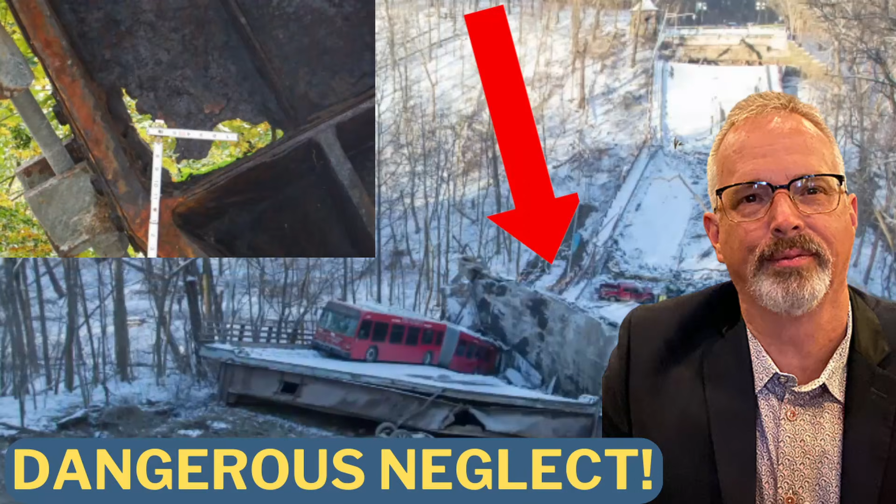We saw this with the Fern Hollow Bridge that had extensive corrosion of the support legs. There were 4 support legs for that bridge. And the corrosion was clear through the main structural support, which again was non-redundant. And then over time, the deterioration resulted in the bridge not being able to carry its design load, and it collapsed as traffic, including a segmented double bus, triggered the collapse, it appears from that video.

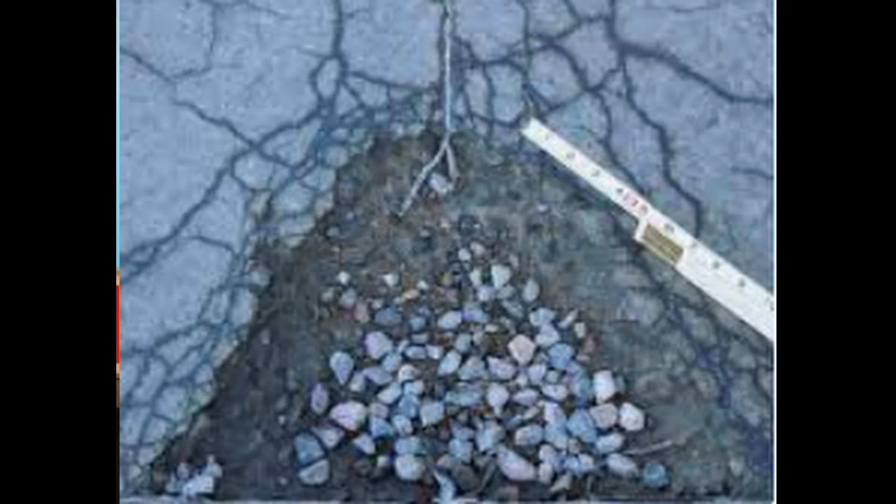So concrete that doesn't contain air entrainment is much more susceptible to damage from freeze-thaw action. It basically causes spalling and deterioration of the concrete over time. You may have seen this on driveways or patios in cold climates where it just kind of chips away by itself. That's freeze-thaw action. And then deck joints leaking above PT anchorage assembly throughout the bridge.

So again, these assemblies aren't visible in many parts of the bridge, but yet they're exposed to water and they know they're deteriorating. In fact, it's not just plain water, it's salt water. When the snow and ice melts in the winter and they salt these bridge decks to keep ice from forming. And this salty water is extremely corrosive to steel elements in bridges like this.

So here they talk about the capacity for the bridge to carry the design loading is just not there because of this deterioration. It says here, repairs and strengthening of the bridge would be a complex operation that carries the risk with regards to viability and sufficiency to fully address the deficiencies within the system. The ability to thoroughly identify and access all areas of the PT systems that require repair carries risk. This is due to the inaccessibility of locations on the structure and the geometry of the PT beams themselves.

The viability of repair requires the removal and replacement of the existing deck to lower locked-in load within the PT beams. Removing the existing deck carries risk due to the significant load redistribution that has occurred with the loss of the tie-downs at Piers 6 and 7. The ability to reuse the existing beams for anchoring of external strengthening is a risk due to the unsound concrete present at the beam ends. The repair and strengthening options for the Washington Bridge are limited, complex, and do not completely mitigate the identified risks with the structure. Now let's go on here.

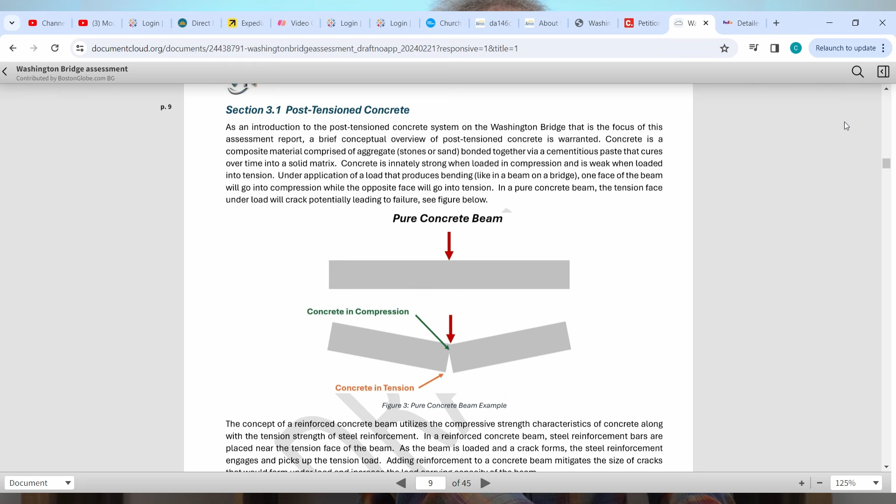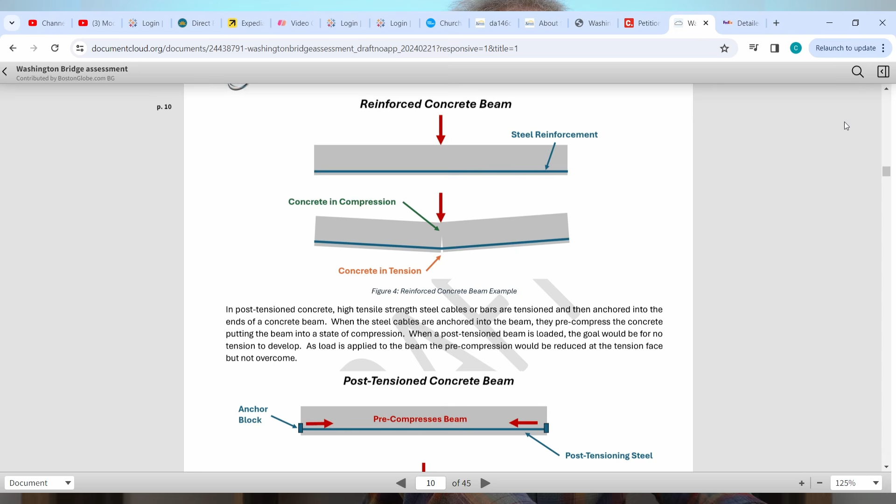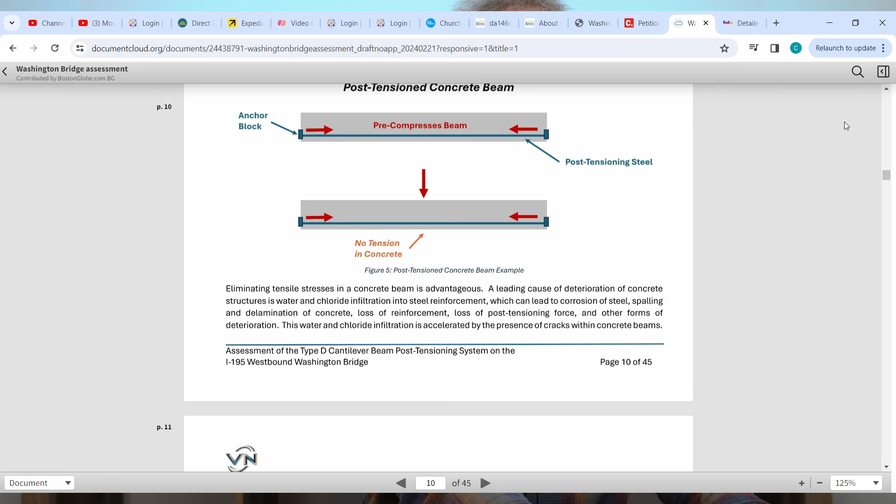They do a demonstration of how post-tensioning works for a concrete beam. First they show a simple beam that's not reinforced, which is prone to tension cracking on the opposite side of the member that's being loaded. And then you have normal reinforcement where cracks can still occur. And then you have a post-tension beam that carries the load without the development of such cracks. So in other words, you rupture those reinforcing elements and the concrete's likely to crack, which is what's happened at numerous locations in this bridge.

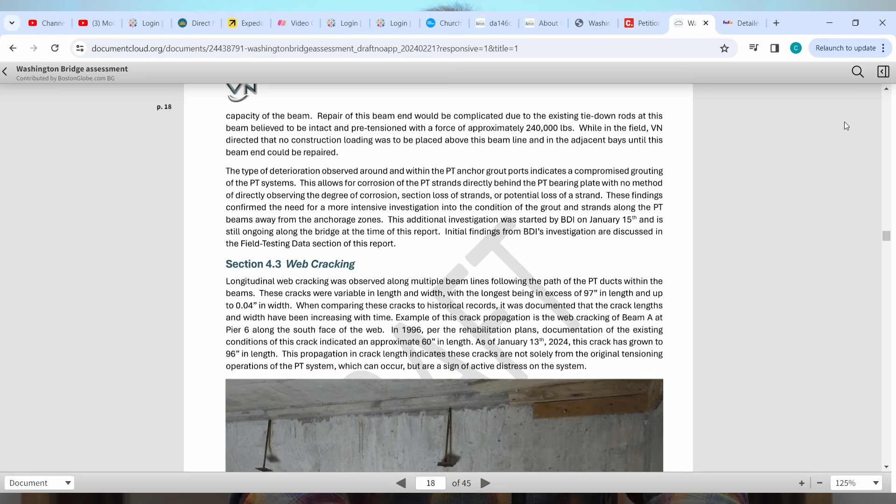I mean, we just see example after example of poor condition. This bridge was documented to be in poor condition for several years, including its most recent inspection in July of 2023. You see longitudinal cracking in the web of the beam for Pier 6. Look at all these cracks here. It says, inspection photo of distress found at end of beam A near Pier 6. That kind of cracking is very problematic.

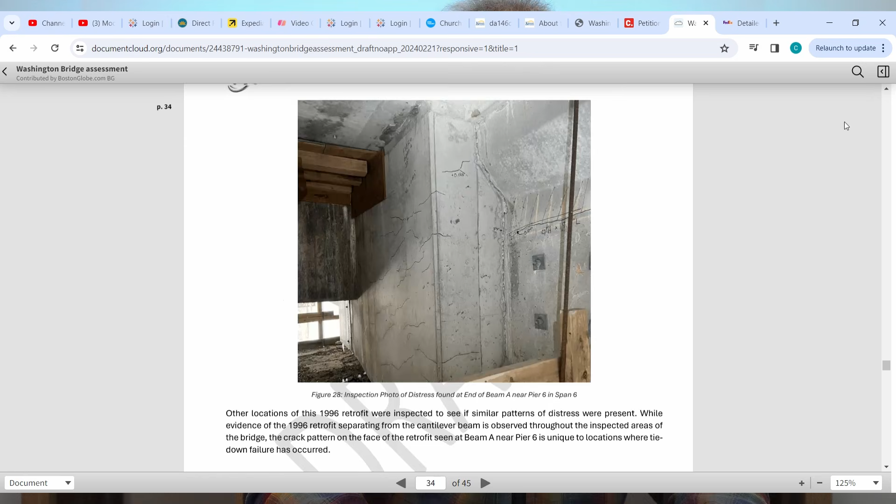So let's go to the conclusions in the report, such as they are. So here they go through the review of repair and strengthening options. I don't want to go through this in a lot of detail. Let's go through the bottom line. To thoroughly repair and strengthen the Washington Bridge would require a combination of the above or similar repair and strengthening concepts. None of the repair and strengthening schemes noted, however, addresses water infiltration at deck joint locations. Water infiltration at these locations directly over the PT anchorage assemblies would remain a long-term risk for the structure.

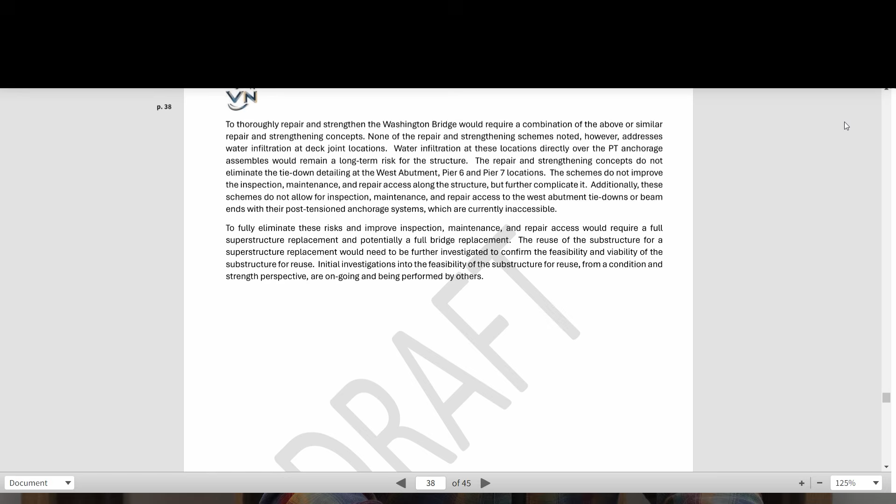The repair and strengthening concepts do not eliminate the tie-down detailing at the west abutment, Pier 6 and Pier 7 locations. The schemes do not improve the inspection, maintenance, and repair access along the structure, but further complicate it. Additionally, these schemes do not allow for the inspection, maintenance, and repair access to the west abutment tie-downs or beam ends with their post-tensioned anchorage systems, which are currently inaccessible. To fully eliminate these risks and improve inspection, maintenance, and repair access would require a full superstructure replacement and potentially a full bridge replacement.

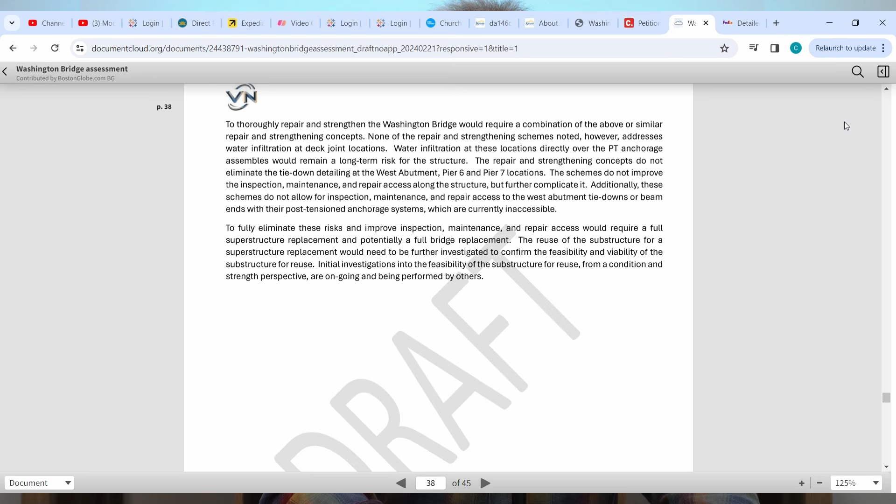The reuse of the substructure for a superstructure replacement would need to be further investigated to confirm the feasibility and viability of the substructure for reuse. Initial investigations into the feasibility of the substructure for reuse from a condition and strength perspective are ongoing and being performed by others. So one of the things they mentioned in the report is if they try and repair this bridge, and I perhaps should go through this real quick in terms of what the options were for repair.

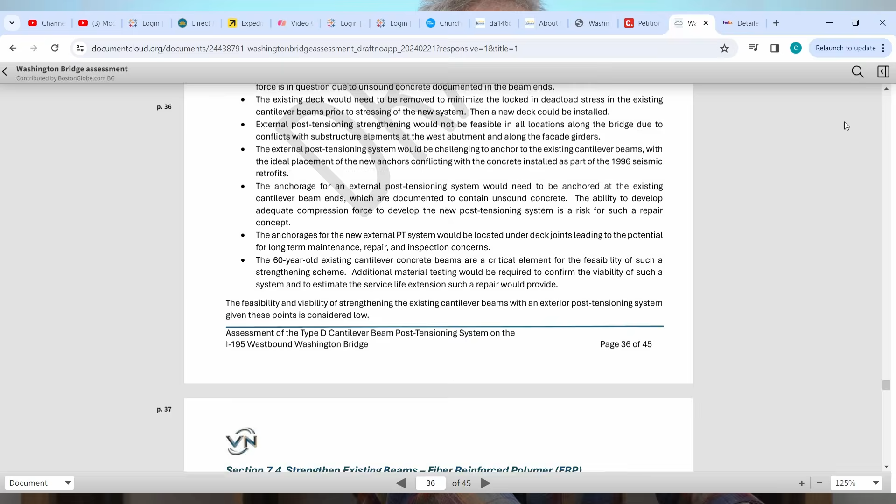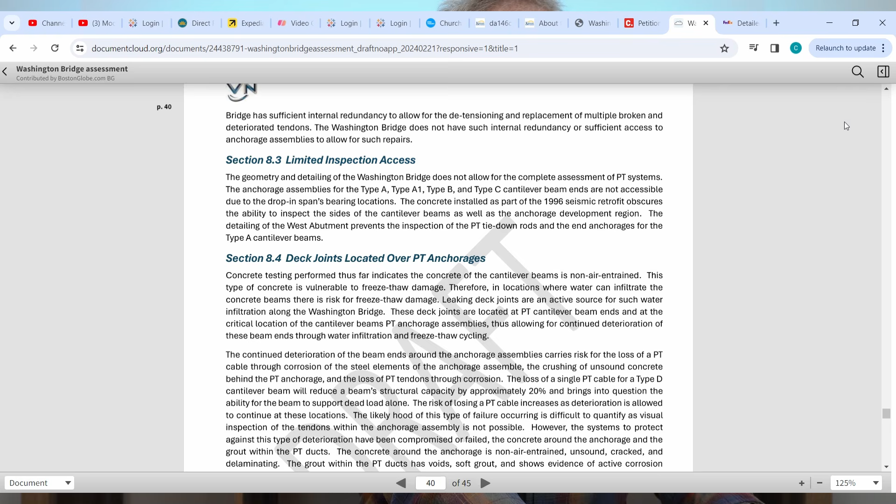So you close the joints along the length of the bridge to prevent water infiltration. You repair the post-tensioning system and beams. You strengthen the existing beams using external post-tensioning systems. And then you strengthen existing beams using fiber-reinforced polymer. You can put another beam next to the one that has distress, and there's other methods you could look at. So let's look at a couple things here.

In a nutshell, what this report indicates is that trying to repair this bridge would not only be dangerous, it'd be kind of a nightmare because it's like working on an old house. I don't know if you've had this experience, but I had a house that was over 50 years old, and I'd go to, say, fix a plumbing related problem, and there would be 2 or 3 other things that I would discover in the course of that repair that also had to be fixed. And that's what's going to happen here if they decide to go with a repair option. I don't see it happening.

The bridge is at the end of its normal design life at 55 years at this point. The engineer in this report points out that this was a very complicated design. It wasn't a very good design from the standpoint of maintenance and inspection. And if you're responsible for managing the transportation infrastructure for projects in Rhode Island, you need some degree of certainty. You can't tell people, okay, it's going to take us 12 months to repair the bridge, and then you get into it and realize, oh, no, it's not repairable, or we found many other things that now have to be fixed. So instead of 12 months, it's going to be 24 or 36 months. So they'd be better off just simply replacing the bridge.

Now, that's going to be a major undertaking. And as I pointed out in previous videos, there's permitting aspects. I don't think a design has been performed for a westbound bridge replacement. So the most expedient thing, even though it could take a long time, I think in my previous video, I thought that they could accelerate bridge replacement and it would take somewhere between 18 to 24 months. And many of you commented, there's no way, this is going to take much longer. And seeing how slowly they've moved on this so far, I completely agree.

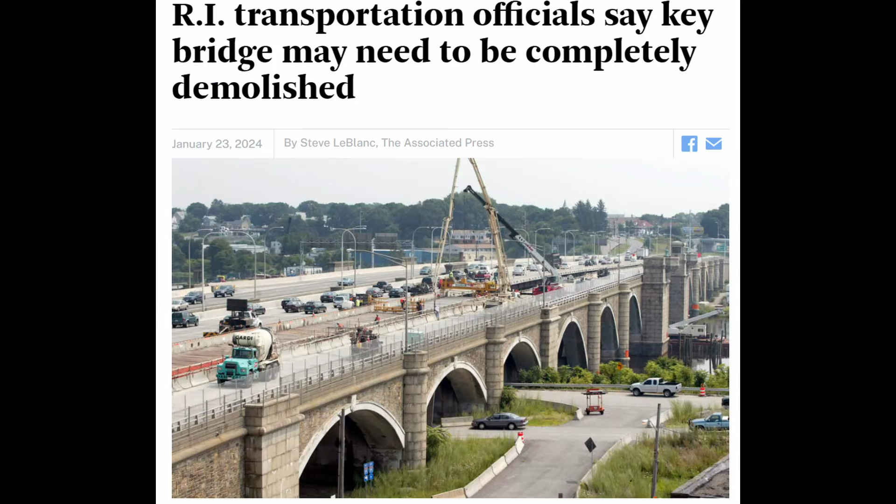I think the bridge is going to have to be replaced. There's no question about it. I don't know why they're dragging their feet, trying to get more data or trying to get the nerve to just tell people that their impacts are going to be ongoing for a much longer period of time. So Alviti admitted a few weeks ago that the bridge may need to be replaced altogether, and that was before this draft engineering report was leaked to the media. As I mentioned, this bridge was noted to be in poor condition, that is structurally deficient, for several years, including its most recent inspection in July of 2023.

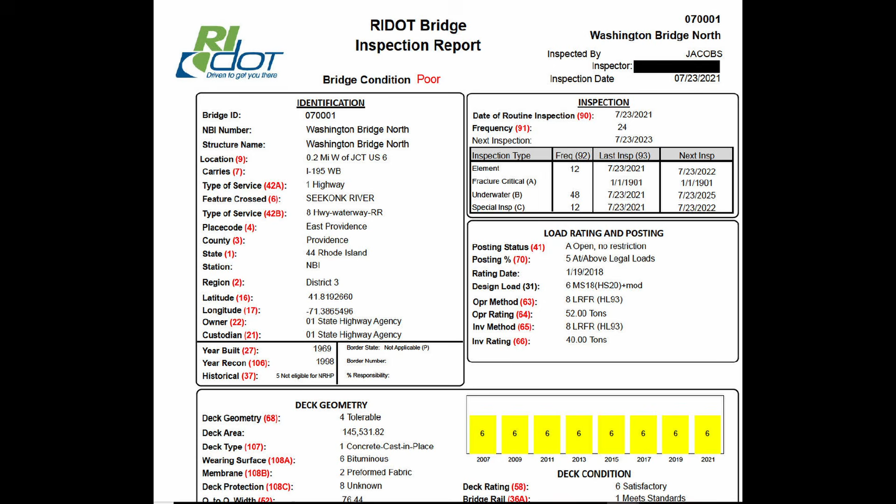Now, I noticed in this engineering report, they didn't get into the timeline of the failure of the components that they noted in their report. And they didn't get into whether there were any deficiencies in previous inspections that might have missed some of these serious problems with the bridge. But if you read between the lines in their report, they basically say this bridge is extremely hard to inspect and know exactly what's going on with it, given the way it was designed and built.

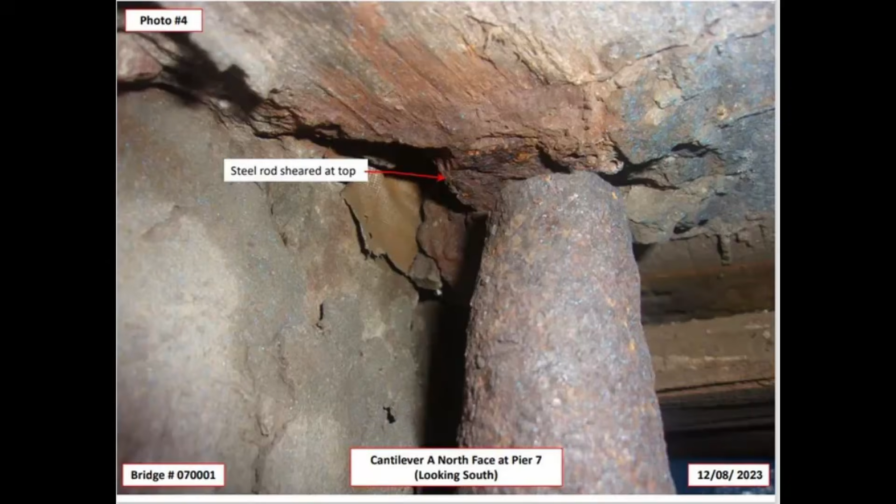Now, there have been recent media reports about specks of blue paint on the broken portion of these anchor rods. So if you can pin down when the painting occurred, you would know that the damage occurred prior to that painting event. But no further information has been presented about that. Now, we talked about some of the impacts the closure of these westbound lanes has had. You see a huge drop in business in East Providence. Some people are talking about moving. It's just too big of an impact on their lives or businesses.

You've got the whole political aspect of this thing, where apparently this problem with the bridge was noted on a Friday, December 8th, and it wasn't until the afternoon of Monday, December 11th, that the Rhode Island DOT director was made aware of what was going on. And then about an hour after that, the governor of Rhode Island was notified. So the governor appointed one of his staffers to be involved with all aspects of this bridge evaluation going forward. So that signals, I think, a loss of confidence perhaps in Director Alviti's ability to manage the situation.

And the contractor who lost out on the repair contract for the eastbound lanes pointed out that these joints could fail, and no action was taken to further investigate his claims, apparently.

So the other dynamic you have with this whole project is what's going on at the top of Rhode Island DOT. And I've been critical of Director Alviti from the standpoint of him throwing information out there that wasn't based on any apparent evidence, such that there must have been a rogue truck that crossed and caused this damage to the bridge subsequent to the July 2023 inspection. And if it weren't for that junior engineer, that damage wouldn't have been known.

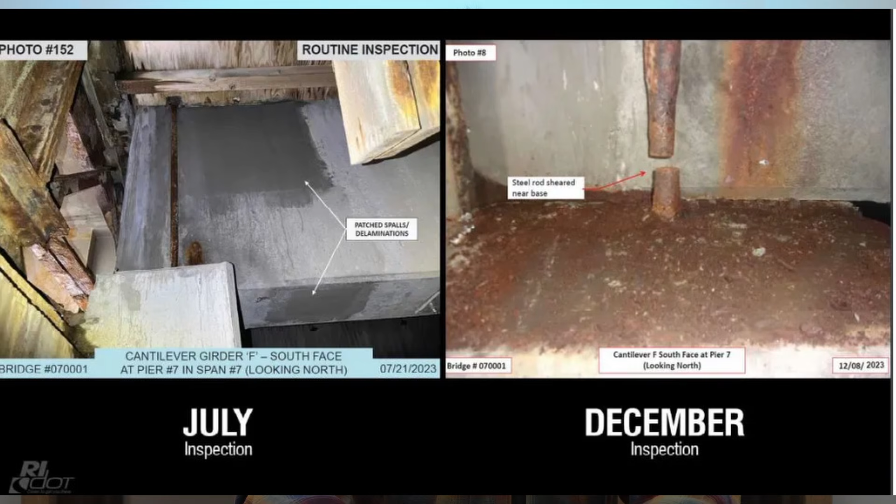Now they're obviously not talking about a rogue truck that was overloaded, because the damage and deterioration of this bridge is widespread. Another knock on Alviti: at one of the early press conferences he had after the bridge closure, he floats this picture to try and prove that this anchor wasn't broken in the July inspection. So he's comparing the July inspection photo with the December photo when the damage was noted. But the problem is the angles are different. So the location in question isn't visible in the July 2023 photo. So I thought that was highly misleading.

As I mentioned, Alviti said the closure would be for 3 months while they get repairs done. We're 2.5 months in, and they're still trying to decide what to even do. And as perhaps a sign of things to come, they've decided to add 2 new lanes, one in each direction, by tightening the width of the existing lanes so they can get more traffic onto the bridge, although the traffic's going to be limited to a speed limit of 40 miles per hour. So I think the delays and congestion are just going to continue.

And I think a number of people in Rhode Island have lost confidence in Director Alviti. There's a change.org petition for his resignation. So again, I see no way that this bridge is going to be repaired and put back into service. It's going to take a complete replacement. In that engineering report, they mentioned that somebody else is evaluating whether the substructures could be reused. That is the pier and the foundation that's supporting the superstructure of the bridge.

I can tell you in my business, I've been involved with testing foundations on hundreds of bridge projects during construction, and they were all new foundations. I can't think of a single instance where a foundation was reused. Because if you try and reuse the foundation, you have to have the spans at the same location again. The condition of the piers is largely unknown as well.

It just seems foolish that anybody would even consider trying to reuse these piers in the foundation. I can understand why, because presumably you could save a lot of time by not having to rebuild those. But again, based on my experience and just the ongoing uncertainty with the condition of this bridge relative to its age, everything's got to go. So then it's a question of, do environmental studies need to be done? Can the money be gathered to do this bridge replacement? I have no doubt about that.